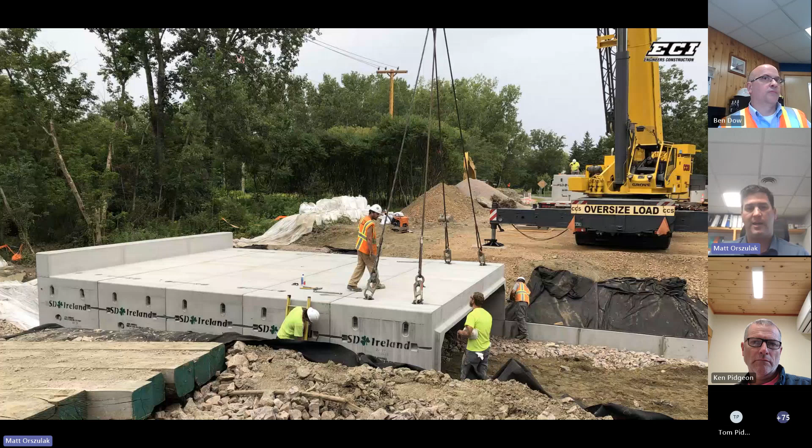So again, just looking at it a little bit different. We want to really focus on the passive, the fall hazard restraints. We want to be in that type of area. And here's some examples. Here's one that we did last year, a controlled access zone for the precast. Okay. We had safety present for this, watching and only going onto the 6-foot fall to pretty much do anything that we need to do on top of the precast culvert.

We can utilize that, but again, it's not a preferred method, but to set up a guardrail, that's very cumbersome, and it doesn't really align well with the phasing of the job. But the controlled access zone meets the requirements, and as long as we're all paying attention and focused on the task at hand and not getting complacent, we shouldn't walk off and fall off that structure.

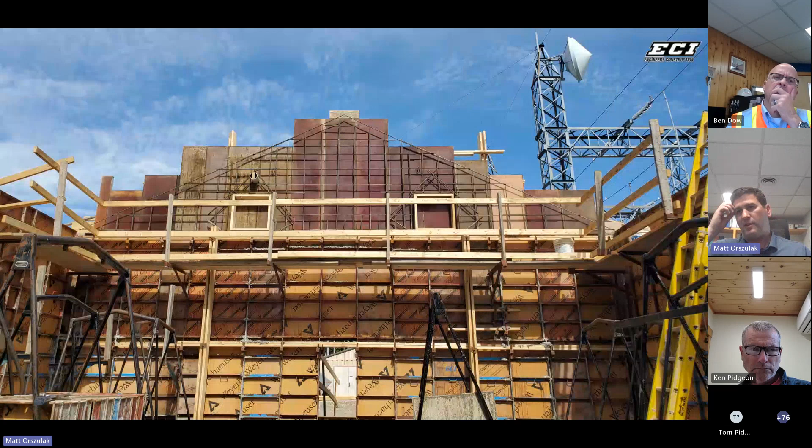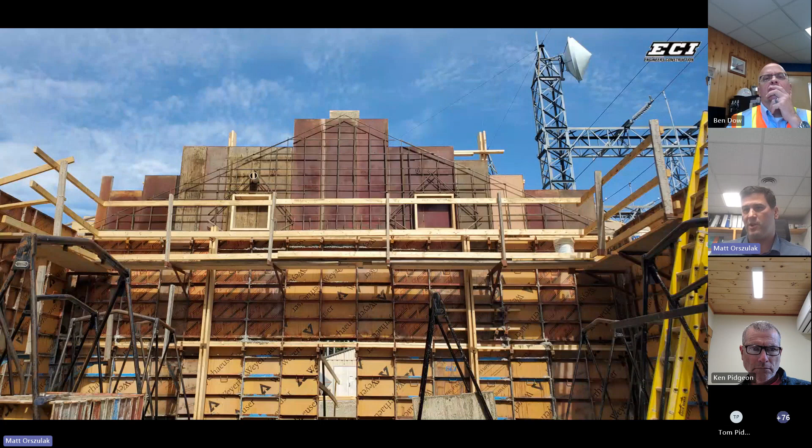So on the other side is the more passive, which is the guardrail system that we typically love to see. And these need to be roughly at 42 inches plus or minus 3. So anywhere in that range from 45 to 39. Our verticals need to be roughly every 8 feet. Toe boards are preferred, especially if we have workers down below, because tools and debris can fall on individuals working below. And it needs to withstand roughly about 200 pounds of lateral force. So if you shake it and you feel like someone can lean up against it and it might break, that system needs to be replaced. So again, guardrail systems are really our preferred method.

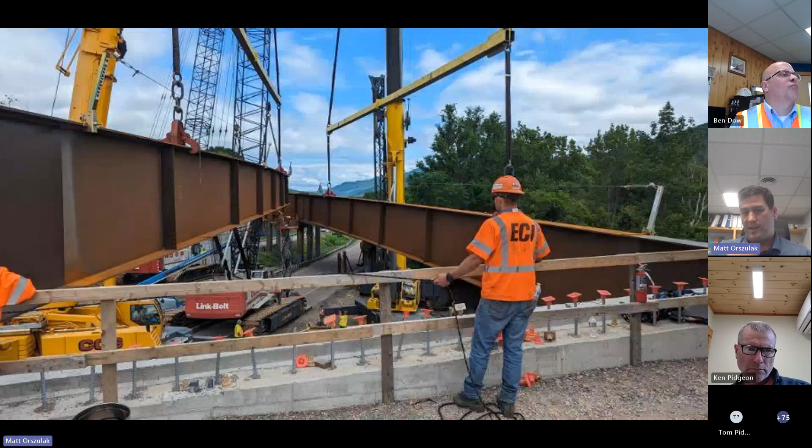And then last is one that we took this week. We have a big fall exposure in Richmond right now, and it's hard to see, but we have a horizontal lifeline. Once these are set, we're going to be walking these beams with a horizontal lifeline. So this is a system that we had to use to perform the connecting and all the steel work. So we're relying on this system with a harness and a retractable lanyard, making sure that if we do have a fall, someone's only going to fall about anywhere from 2 to 8 feet. So it's a well-designed plan.

And we want to make sure that anytime we're using a harness and lanyard, we also have a rescue plan in place, because someone's going to be dangling if they do fall. So we've got to make sure we can get that individual to safety in a timely and effective manner. And please let health and safety know if someone ever does fall, because that safety equipment then needs to be re-inspected. And also the employee should maybe get checked out if they did bump or hit their head or have any suspension trauma at all from dangling.

So big exposure out there on all of our job sites. Let health and safety know if you have any questions on fall protection. Remember all the different types and scenarios that we have. The rule of thumb is 6 feet. Anytime you're above 6 feet, we need to have some type of protection. Guardrail, personal fall arrest system, harness, lanyards, all that good stuff. Tom, anything to add on fall protection that you're seeing out there?

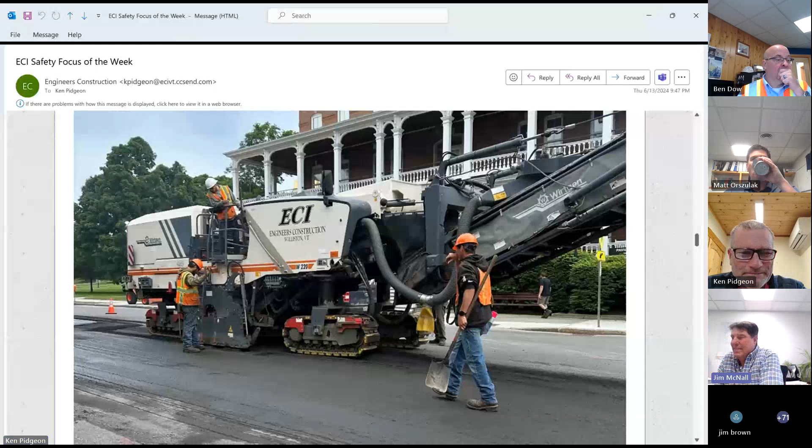Yeah, you can keep scrolling. Ken, that's a nice photo, if you took that one. Yeah, right in front of the State House. Didn't go near that marble, I hope, or granite. No, stay away. Yeah, I like that. Good one.

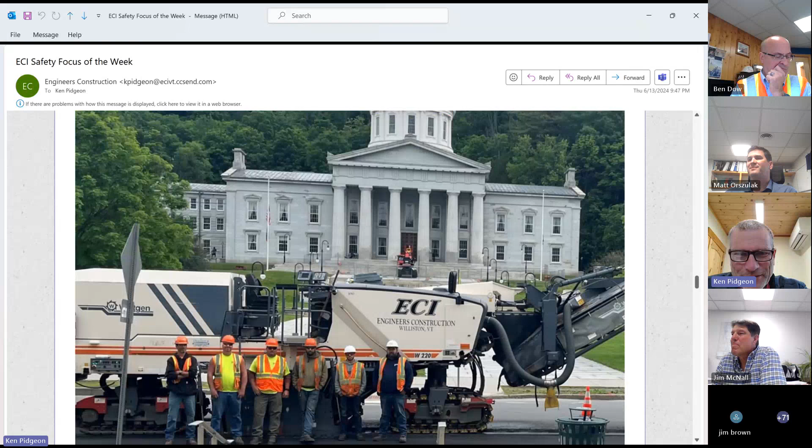John Bushy and crew, Dave Bowen, Adam, Brian Martell, Hunter, and I think Sean Moritz. Great photo. Cool picture. I'll have to submit that one. Actually, I might like the one a little bit lower. Rob Kneebone, and he's working with Gene Goslett on training on their tar truck. Thanks, Rob. That's a great photo, Ken.

Running dual pavers. I think Daryl and Brian kind of doing like the parking row, leading and following up with the big paver and paving crew. Way to get it done a little bit faster. Luckily, the farmers market was just off from where we're doing toward the Bailey Street corner there in the Union Mutual parking lot. Pretty much right at the start of our paving. Yeah, it moved. It used to be over at some of the parking lots in the back, but it's right there in the corner.

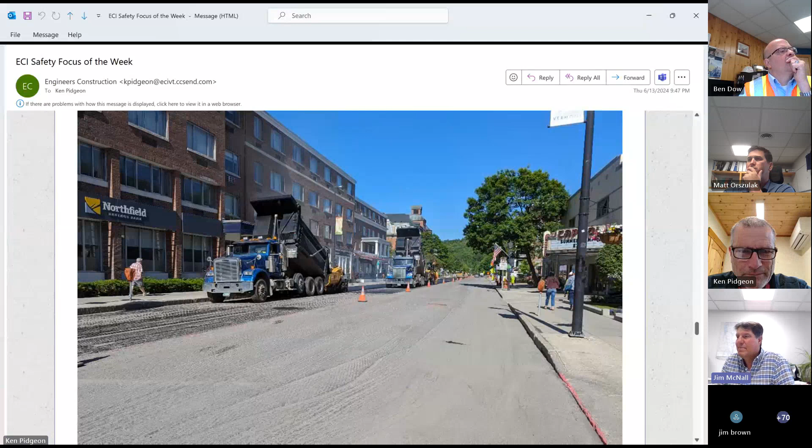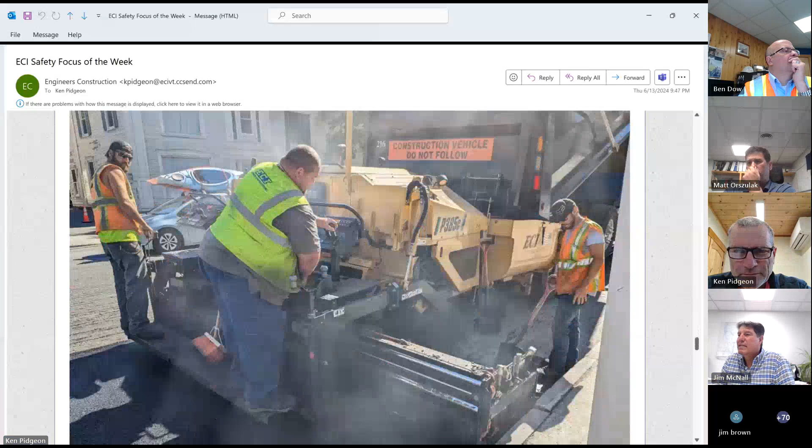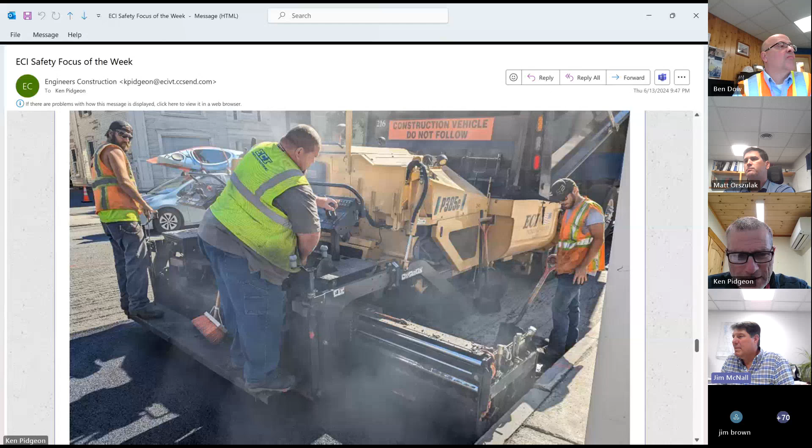And another, I don't know if that's the same side. That's the other side. Again, doing the two pavers. So basically made it one giant pass with the two passes. That made things move along much quicker. There's Daryl and Brian Martell with a small paver leading, doing the parking row. Yep, and that's Hunter there, I believe, with the Weiler.

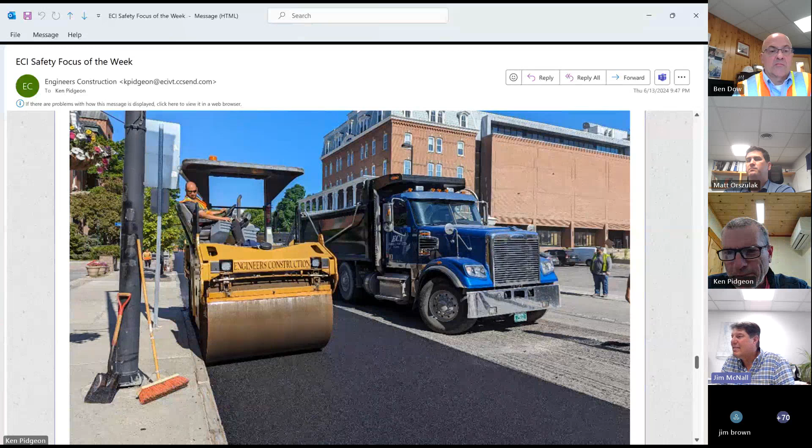Matt Scaramucci on the 10-ton roller. Not sure who the truck is, but nice that it's an ECI truck. Kylie in the background, I think. And here's some line striping going on. L&D doing a little layout and installing some crosswalks.

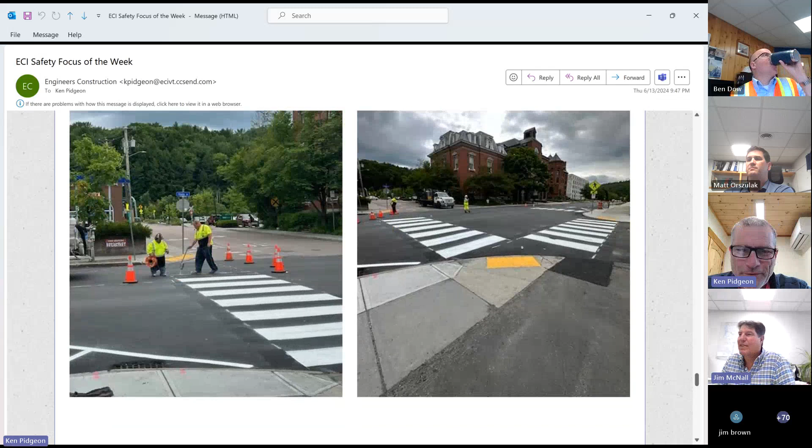They held us up a little bit, of course, equipment and then weather. Weather this week didn't help. Up there, it's all done, completed. Good. Looks good. All right, 100% done then. Yes, we're out of there. All right, we love it. Well, thanks, Jim. You're welcome.